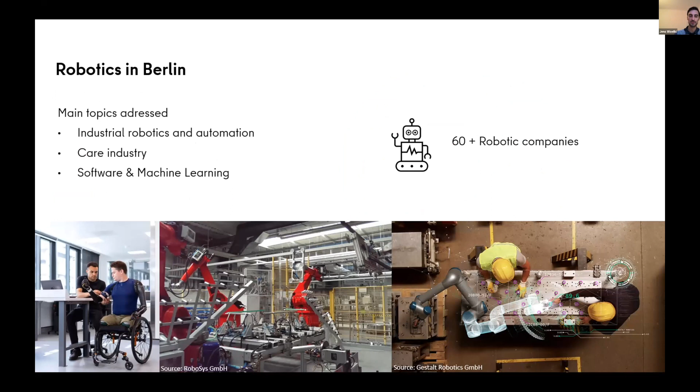That's my last slide. If you would like to get to know more about Berlin, or if you want to cooperate with companies or institutes from the German capital region, or if I can support you in setting up your business here, please don't hesitate to contact me. I'm very happy to support the planned international network, and I'm glad that today we have four representatives from Berlin that will present their technologies and their ambitions to participate in such an international network. Thank you very much. I'm very keen to hear more from the other speakers today.

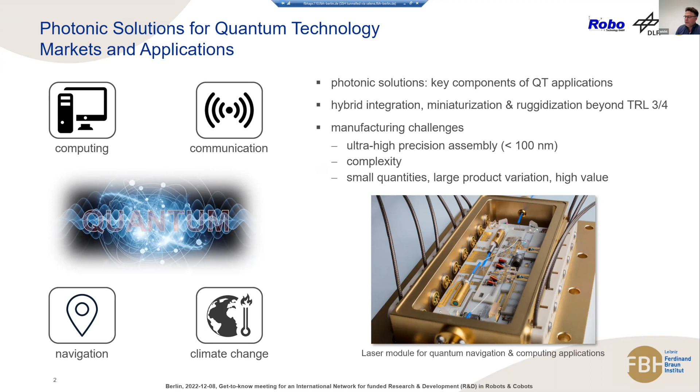Further, typically we talk about small quantities, large variation in the product type, and usually things we produce are also of high value, as single pieces.

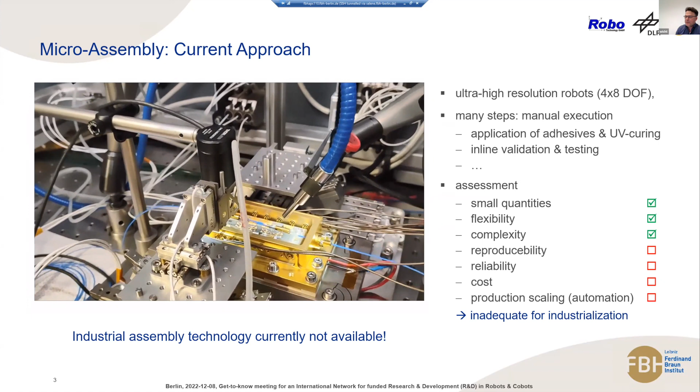So how does it work today? What you can see here is our high precision robots. They are piezo actuator based. You see one of these, the golden piece is the laser module we are currently assembling. The plates you can see are hexapod-like platforms that we can move with 1 nanometer resolution.

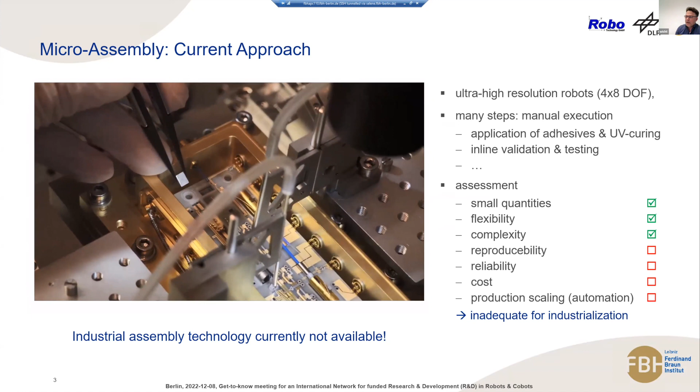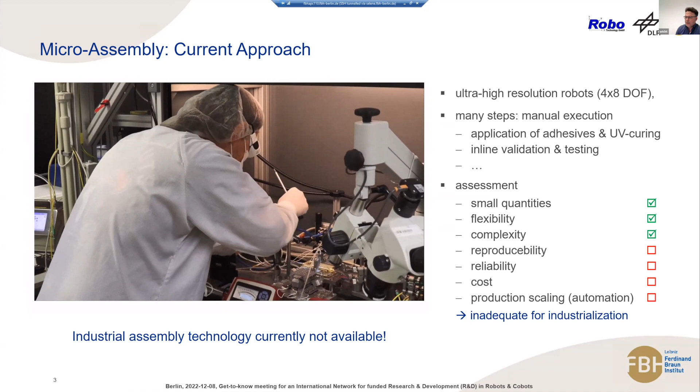A lot of the work is still done by operators, so people have to use their hands to put in components, to modify the integration environment. And this has certain consequences. It's okay if you want to do small quantities - we can typically do about 10 of these lasers per year. It's also very flexible because you can easily modify things.

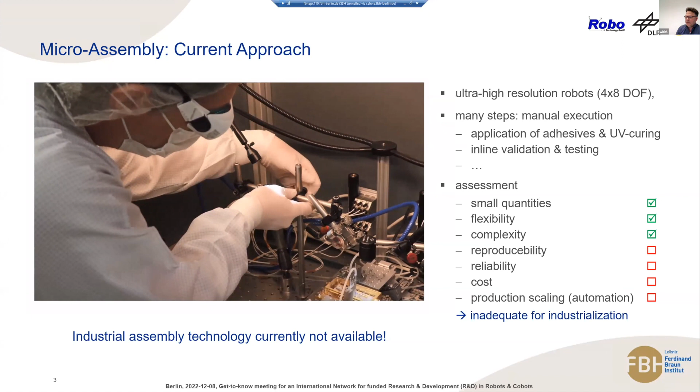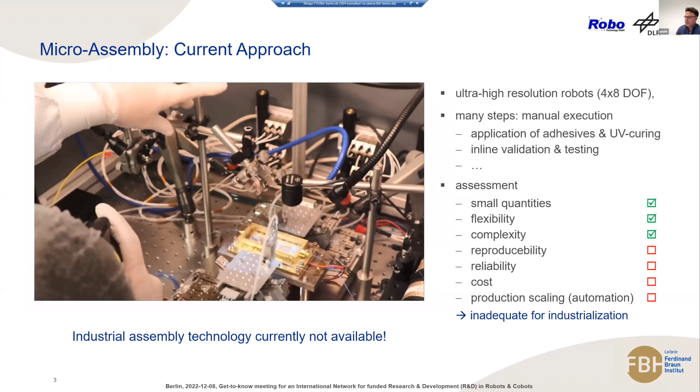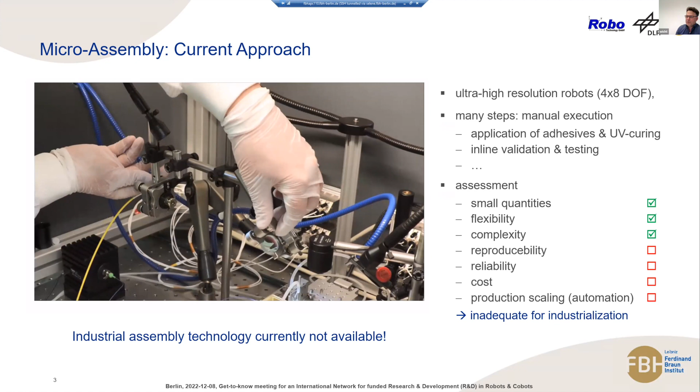We can also deliver highly complex setups. But as a lot of manual work is still necessary, reproducibility is poor, reliability needs to be improved, and cost is very high - just to give you an idea, one of these lasers costs about 100,000 euros. Of course, it's not possible to scale production. So it's an adequate approach for R&D, but an inadequate approach for industrialization.

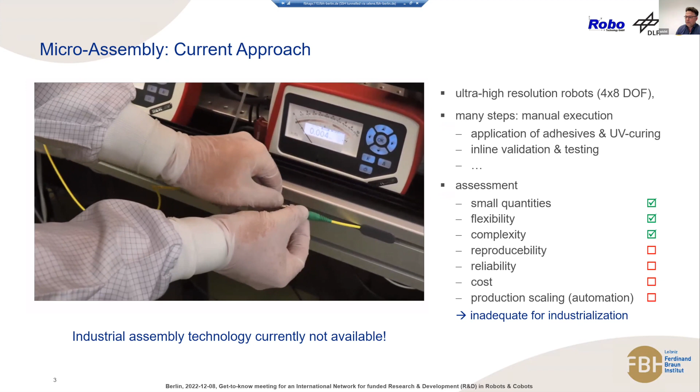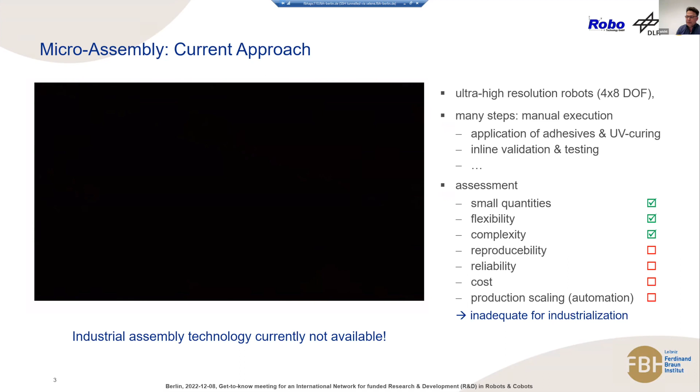If you look for existing technologies, you'll find there's no manufacturing technology available that can cope with the accuracy requirement and also with the complexity. So this brings me to my last slide. I've just described the problem, and this is what we believe is the solution.

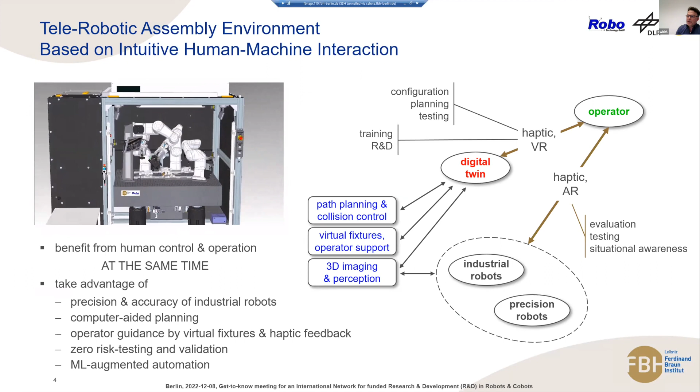The idea is to replace the manual operator with industrial robots. There still will be high precision robots that accomplish the alignment task, but then industrial robots take over work that is typically done by the human operator. The main question is how do you operate this telerobotic environment.

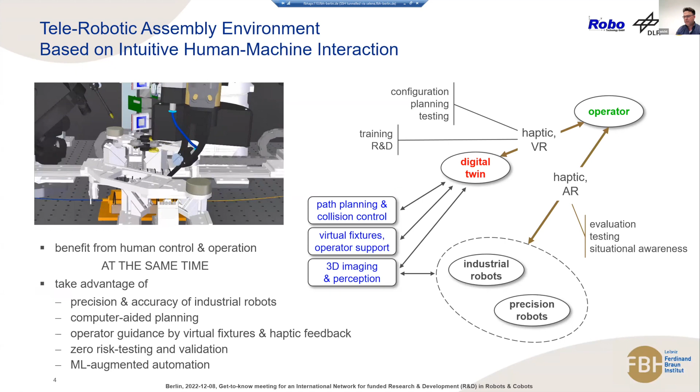You want to keep all the benefits of human operation, so it needs to be flexible. You don't want to have a lot of coding to do. What you're really looking for is an intuitive approach of controlling it. And this is actually what we are doing.

So we are setting up a digital twin with which the operator will cooperate. The digital twin is used for configuring the setup, planning actions, and testing them, also for training and R&D work. There's a haptic interface with force feedback, for example, and augmented reality to evaluate activities that were planned before we actually execute them on the setup.

There's also the idea to create situational awareness, because if you use AR goggles, we can collect a lot of data derived from human activity. The idea is to collect this data and allow the robotic environment to learn from the operator. A lot of work can actually be done without the help of the operator, so path planning can be automated, collision control too. We would use virtual fixtures to support the operator, and there's 3D imaging included, which allows perception, supporting at least partial automation in the long run. So this is, in very short, the idea behind it. I hope you got a decent impression, although I'm not a robotics expert.

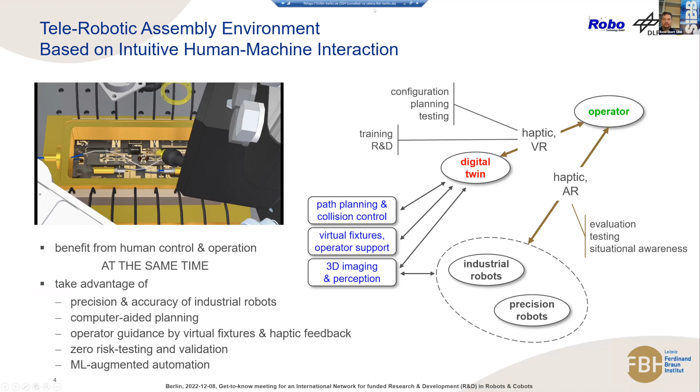This is not the time for it, we have at the end the open exchange discussion round, like we call it in the agenda. But one question quickly to you: how much experience do you have at the Ferdinand Braun Institute when it comes to international cooperation for research projects? Do you have this already? Are you keen on doing this more?

Yeah, so we are very well integrated into the national and European research landscape. I didn't say really anything about the FBH because there wasn't enough time. We are about 360 people working at FBH. We are engaged in multiple EU-funded projects. A lot of money comes from BMBF, BMWK, also the German Space Agency. So this is one of our focuses.

And of course we are always interested, so I'm looking forward to see whether there's any good point for cooperation with other partners.

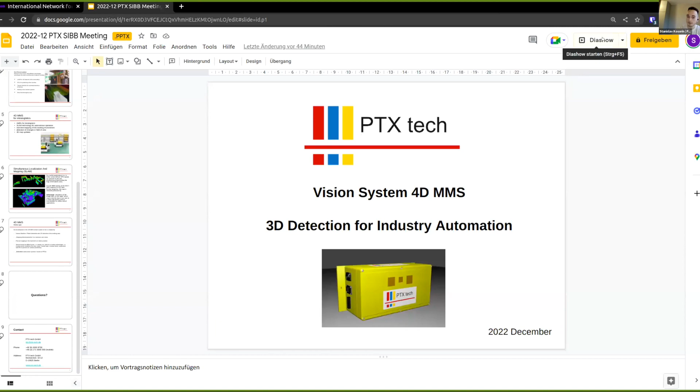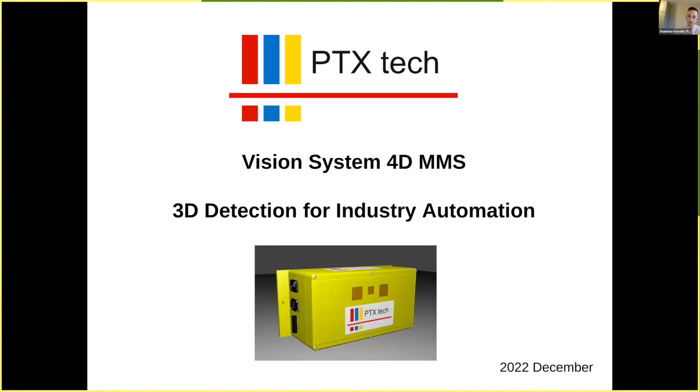So I'm Stanislav, I'm from the company PTX Tech. We're based in Berlin, and I'd like to present to you our solutions and ideas in the area of 3D detection for industry automation. So I'll just cut straight to the chase.

The biggest problem we are addressing right now is that in factories, the safety and security of the workers is currently done with fences and light curtains. So if there's a machine that could be dangerous for a worker, that could injure a worker, there has to be some kind of safety feature in place to comply with the safety regulations of the country.

Our solution for this is our 3D sensor, our 3D platform, 3D technology. How it works is basically we watch the safety area from above, the area where it could be dangerous, and then we detect any intrusions of the safety area by humans or robots, maybe, whatever. So these light fences or light curtains could basically just be put away, and our technology could be the solution for this.

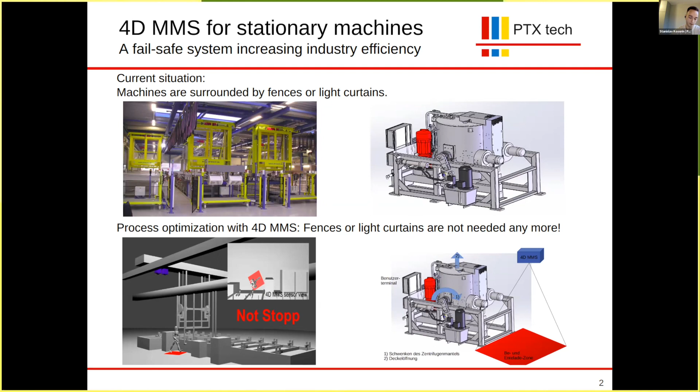So why is this important? The idea is that when someone steps into these light curtains or fences, the whole production has to be stopped basically. With our sensor, we actually increase the efficiency of the whole production while being as safe as these fences or light curtains.

And of course, there are subcategories of what it means to improve these logistics and production processes. There is, for example, man-machine interaction with robots and machines, which I already talked about. There's also dynamic pick and place, volumetric dimensioning, or the detection around AGVs and vehicles, which I'll be talking about in detail later.

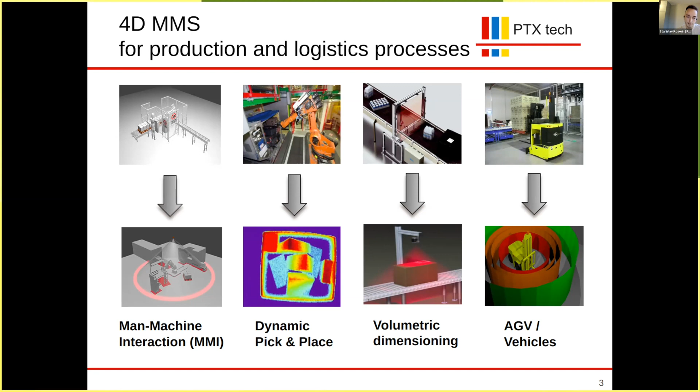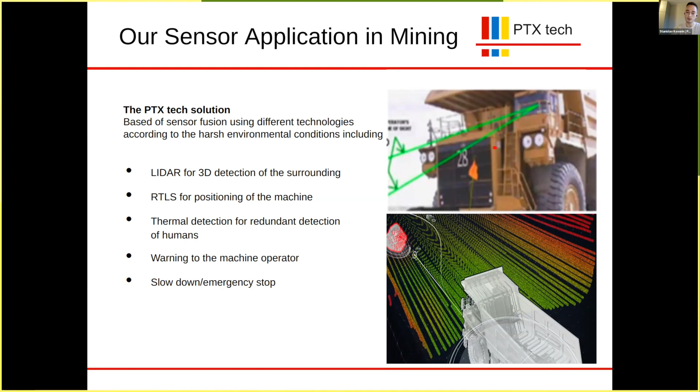Our current application, what we're actually working on the most right now, is application in mining, basically in mines or quarries or any area like that. We use our 3D detection for that, but these environments are very difficult for detection, localization and mapping. So we're looking to cooperate with an RTLS system, real-time localization system for positioning, or maybe other sensors. This is an area where we already experienced so-called sensor fusion, combining multiple sensors to build a robust system. The idea is to give a warning to machine operators, or slow down machines or stop them if there's a collision.

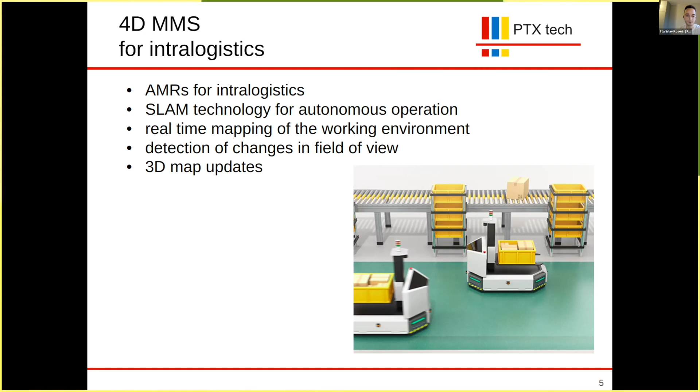Also, as I mentioned, our application in the area of intralogistics is the so-called SLAM technology. This is actually my area of expertise. SLAM is simultaneous localization and mapping in factories or indoor areas, where the robot runs around, maps the area, and simultaneously does localization, so we know where the robot is in real time, or the AGV. This has already been done multiple times, in multiple use cases, but what we do is real time - it gets computed on the robot in real time, and the positioning also gets done in real time.

The problem we are facing right now is once again with the real-time localization system, which we're looking to expand in that area to combine our 3D detection with some kind of localization, so that the detection is robust and able to work for multiple hours without being reset or without human intervention.

So that was maybe a lot of stuff at once, but basically our main points are human, machine, and robot interaction with 3D detection in industry applications with difficult conditions, or where robots or machines could injure humans. Then there's precise mapping and positioning of the machine, and also an area really exciting for us: sensor fusion in difficult conditions, where we'd love to cooperate with other sensor companies or platforms. Oh, and I forgot to mention, we built our systems and prototypes - the hardware, the FPGA - ourselves and programmed it ourselves in order to fit the use case perfectly.

As you can see, this is a very difficult topic, a very difficult area, and not many companies actually do 3D detection because it's hard. That's why we're looking for any collaborations, scientific or industrial, and we're very open to ideas about use cases and discussion.

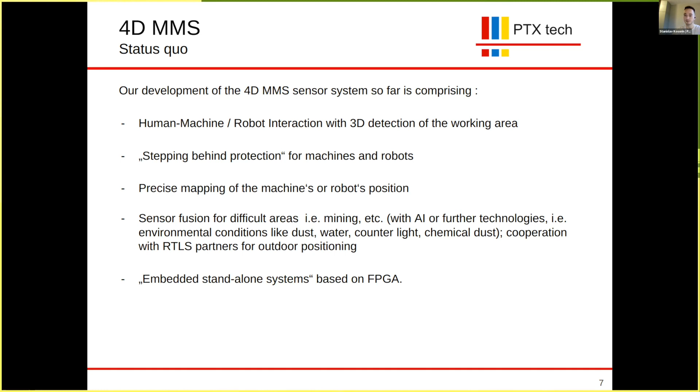So thank you very much for your attention, and if you have any questions, just ask. I'm very eager to answer.

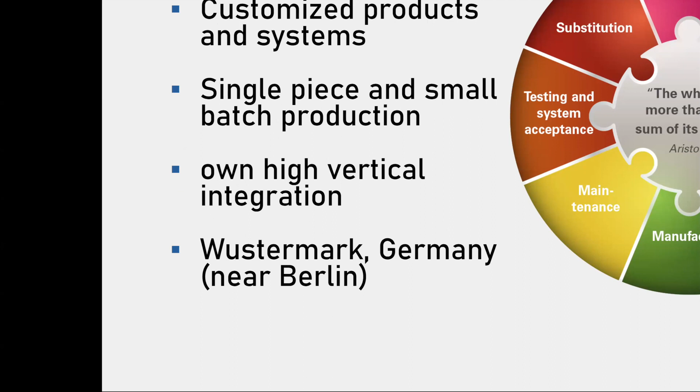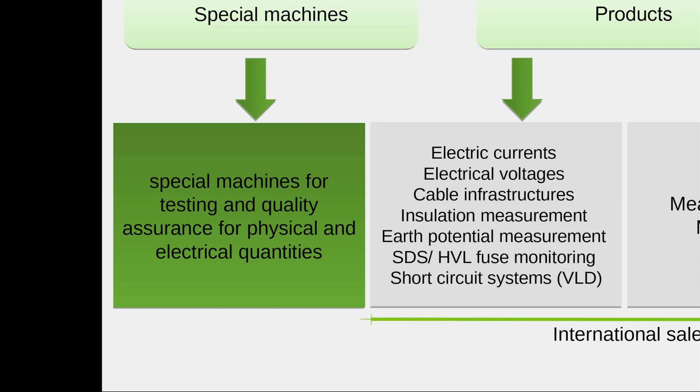In Bern, in Switzerland, some other countries, also now in Taipei, and in Turkey we have installed some special devices for monitoring in the railway industry, special DC monitoring. So that's a short impression about our customers.

To understand this a little bit more: when you have a railway system, you need different kinds of monitoring devices to control it. So you control your voltage, you control your current, etc. And you have a system to monitor potentials too, so that everything runs safely.

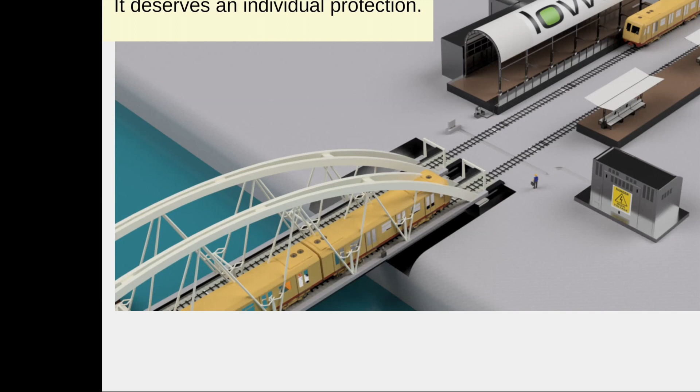So this is what we are doing, and we are developing this around the world. We do this with special hardware, and what we design is very flexible. So on one side, the software level is quite easy to make individual.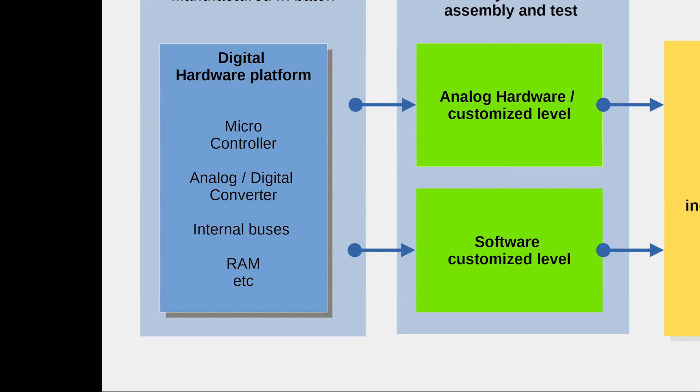But what we are also doing, we make the analog device individual for the customer's jobs. That's what 'individual' means here. We have some analogs where we could measure milliamperes, millivoltage, but also we have a project where we develop measurement of 175,000 volts and 80,000 amperes. So we have a wide range of what we could measure and control on our platform.

The platform is a component of different kinds of devices, which you could assemble like Lego. You could put this together and do different kinds of control, everything you need for the DC level, etc. So it's a lot of engineering.

I could tell you a lot about railway, a lot about what I'm doing, but what I'm more focused on is my idea to go into a project we are doing. So we are experts in DC. We say, why is DC interesting?

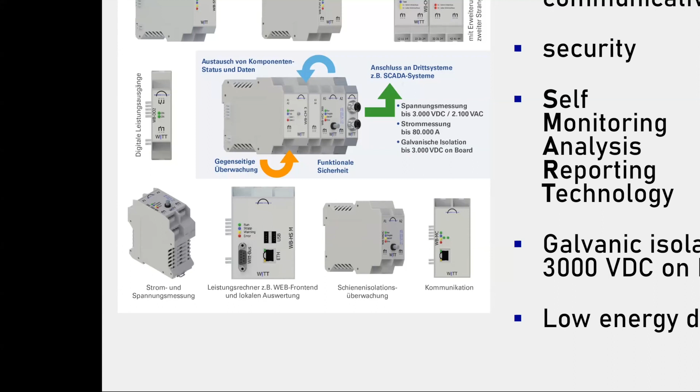It's very simple, because you could save a lot of energy when you use DC. The normal way is when you have a normal industry system, you have AC input, and then your computer runs internally with DC. Your light has no problem running with DC. Your actuators, up to the energy you need, also have no problem running with DC. And your robots, of course, also run fine with DC. So with all conversions between AC and DC, you lose a lot of energy.

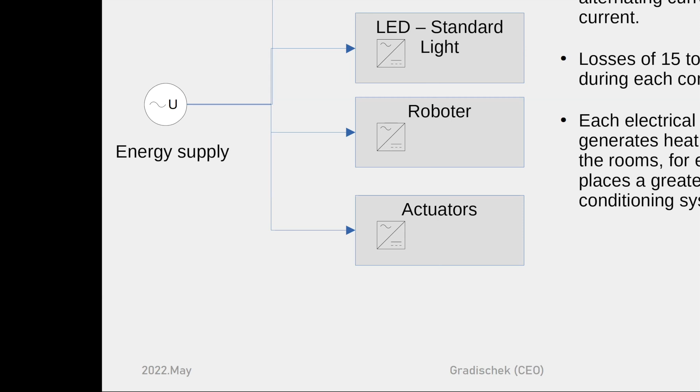When you think a little bigger - I know this from a special company in the car industry - we had to make a calculation. It's a huge plant, but not the biggest plant from this company. They save more than 5 million euros per year just by taking everything from AC to DC and changing it all. So we have a big project with them underway to change a lot of things in this company. I hope the screen is okay - I made a short copy, so I don't really see it.

But why do we talk about DC? We have solar panels, we have them in the east too - there's no problem getting solar panels on your roof. You have batteries, for all the cars, all the trucks, all the buses - the batteries need a new second life.

So now you could make a different kind of cabinet. When you have an AC cabinet, everybody could work with them, everybody knows how to do this. A DC cabinet is different, but we are experts in DC cabinets, so it's no problem for us to make planning for that, to integrate that. So that's what we're doing for some special projects.

What our project is looking for is we will support companies to change robots, for example, from AC to a DC system. We integrate that. So for the customer on the line, when they have a solar system on the roof and a battery system, for example, they could save a lot of money for that. So this is one of the projects.

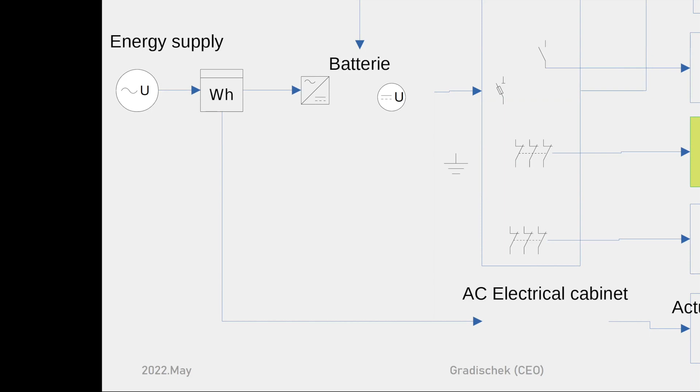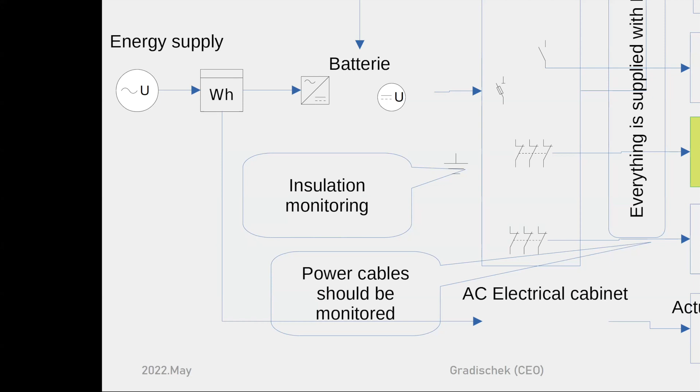We have devices, we have the idea, we have to know how to organize a safety system for a DC system when it's changed between AC and DC, that's what we're talking about. You have different kinds of requirements: insulation monitoring, special cables, etc.

Our second idea for this project is we want to make a handling system for assembly support. Our customers are railway industries and some other individual companies who build machinery.

A wagon in a railway is very heavy, and they have a lot of jobs that are very complex to fix because they always need a support transport system on the top floors. It's much easier when we have some other support system to assemble that, or for repairs. We spoke with some customers before, René called me, and I went to the customer and said, hey guys, is that an idea from you?

And they said yes, yes, it will be helpful, because we have use cases where the top transport, the heavy system that normally handles this, doesn't run smoothly. It's uncomfortable for the assembly workers, and handling heavy things manually is very dangerous.

So the idea now is that we give the human a cobot, not because when I spoke with them about robots, their thinking is always the same, that robots always do the same job.

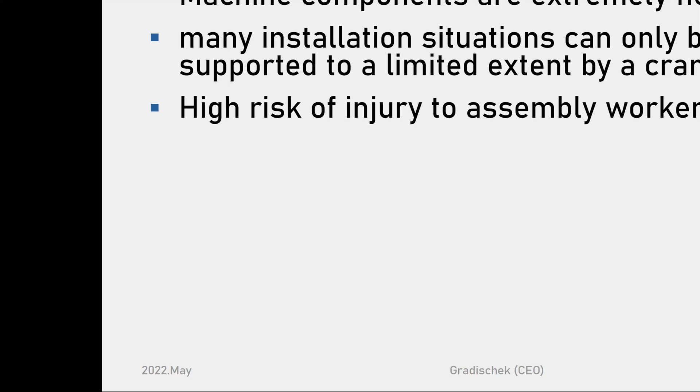Because we are not experts in robots, we are experts in DC and measurements. We also do sensors, vibration sensors. We have special devices that analyze railway industries and rail infrastructure. So we have measurement devices, we do sensoring, and we make the data ready for the next level, for motors, etc. Okay, so that is our idea, and I hope we could join something together.

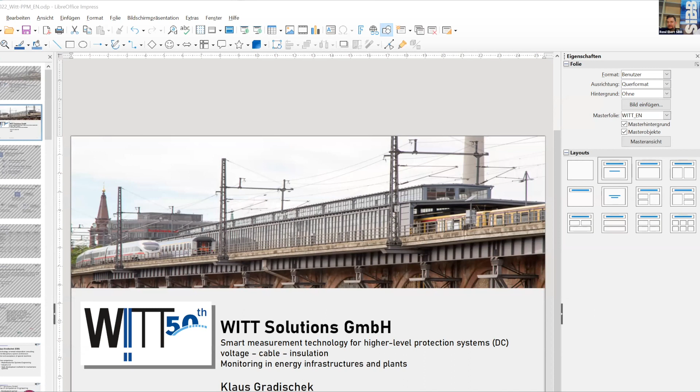I think you touched on the point, even if you didn't mention it directly, of lacking workforces. I see that in every branch, not only in IT, but in other industries too, we are struggling with the lack of workforces, and there might be cobot solutions in the future that we can't even think of today. But you had already highlighted one of your ideas from your customer base.

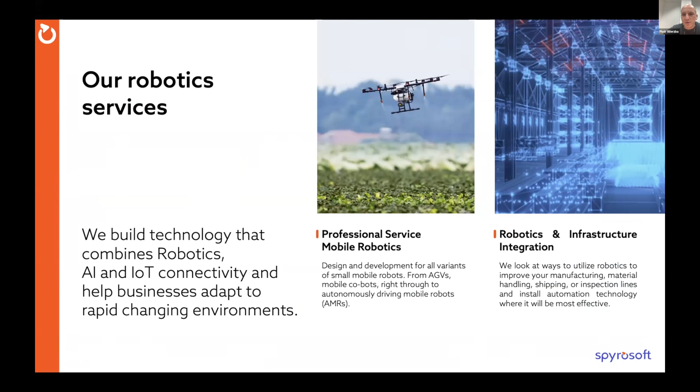Oh, I see that Piotr is sharing the screen. That's great. Yeah, this robotics is something we have in our heart, and these mobile robots are presented here. On this slide, you see that we are good in professional services for mobile robots and also infrastructure. So this is on the right side.

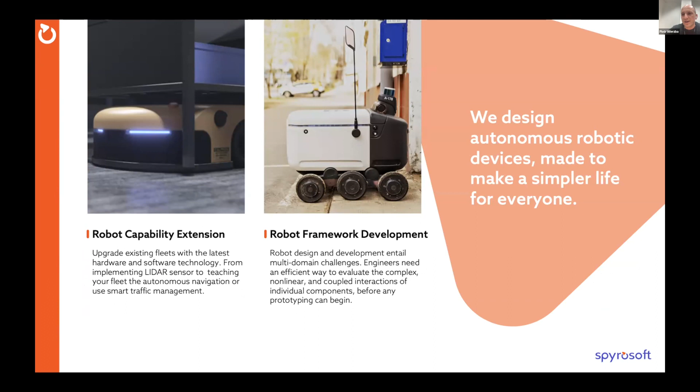On the next slide, please Piotr, we have some ideas how we can extend the current robots. Our customers come to us and say, yeah, we have a robot off the shelves and we want to extend it with something more. So this is what we are doing. Looking at the competences in short, yeah, I have 2 minutes so I'm running fast.

So from the left, we are doing the design for these robots in terms of platforms like fleet management, through the data, through the cloud. Nowadays cybersecurity and connectivity is quite important, because robots are flying and it needs to be safe. So that's why we are taking care of that area as well.

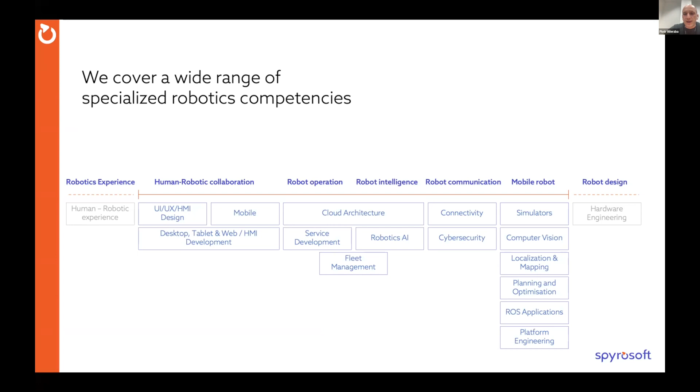And in the end, these mobile robots - what I mentioned about simulations like in Gazebo, or computer vision, the eyes of the robot, and the navigation. This is something we often do on the ROS platform and on different hardware. So this is the competences we take care of.

Just to put our imagination on, even that it's after 4pm - for instance, we take care of special elements for drones in terms of LiDAR scanners. This is what we are doing right now in our office in Szczecin. Szczecin is close to Berlin, so we have a short road. Rene visited us last time, so I think this is proof.

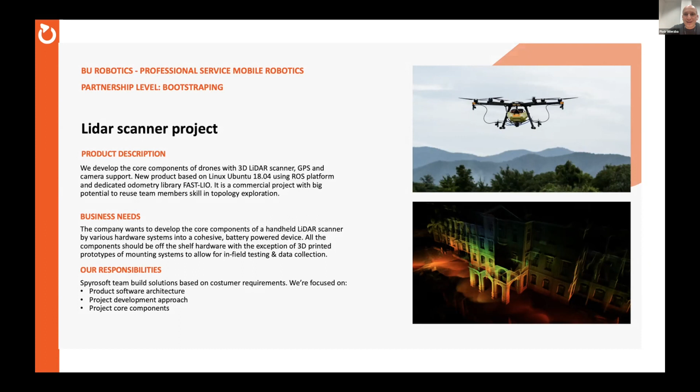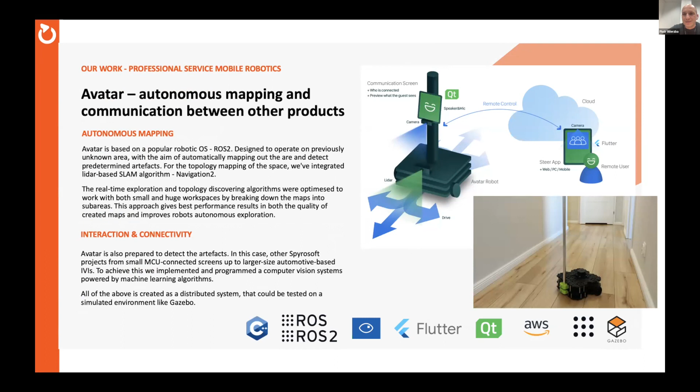Looking at the next slide, just to show you the skills we have - we do a lot of concepts of robots, starting from simulation to navigation, like you see here. So this is just an idea of what we can do together. Happy to talk with you.

Thank you very much, you did a tremendous job. It's all about wow - they have to have the wow effect in the brains of the other CEOs and companies, executives we have here.

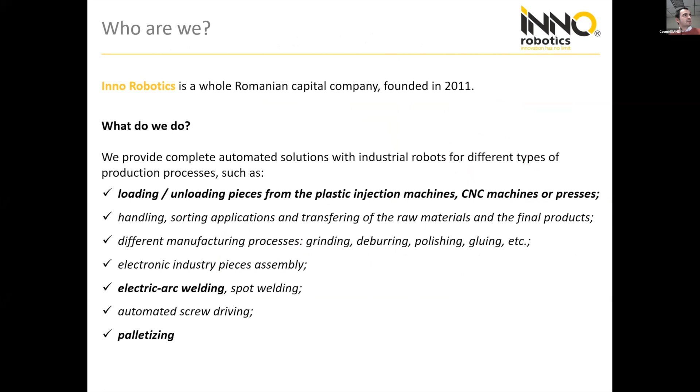So the name of the company, Inno Robotics. Again, this is a short history of the process which we made until now.

As I presented, we work with a few big names in robotics and also on MIG-MAG welding. Now we have under development a new robotic cell for laser welding, with TRUMPF equipment. It's a new process which is not on the market yet. We try to weld remote with some powder. This is for aluminum welding. It's a very new process, and I think it will be a success in the future.

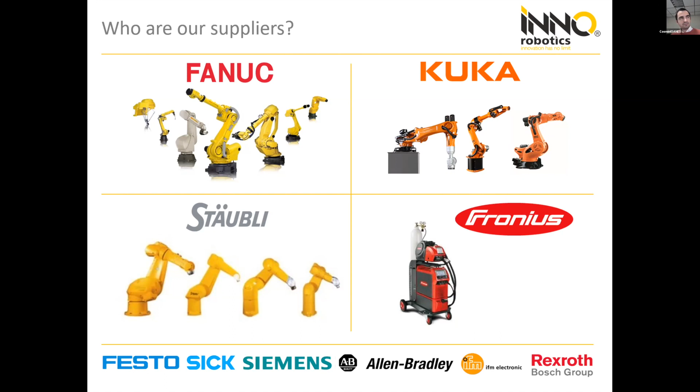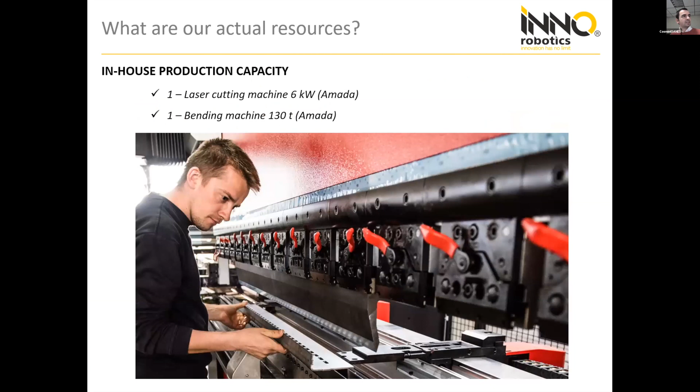Also, we have some in-house production capacity because we make a lot of parts which we need for our equipment. Regarding development, we started the expansion. This year we opened an office in Hungary. We have a plan next year, in the middle of the year, to open an office also in Germany, where we try to have offices for sales and support, and after that see how we can grow there. And the next one for the plan is Poland.

Regarding R&D, as I said, we started in October with some institutes from here in Romania to develop a new robotic cell for laser welding. I can talk more about the project, but probably we can connect another time for this.

This is a part of the customers which we worked with until now, and some of the products which we developed in the last 2 years for the market.

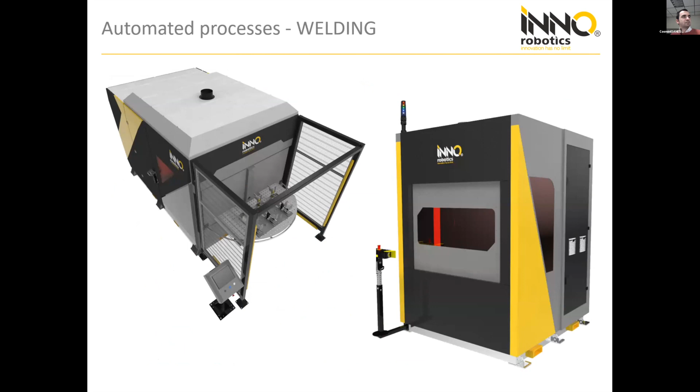The last project which Andrei presented was on European funds, on DIH. It's a robotic cell which was developed for small and medium companies. It's welding, and after that polishing the part. It's only for this company because it's necessary to have a small batch of parts. For high volume, it's necessary to have a separate cell, but this is proper because it's not a huge investment for the company.

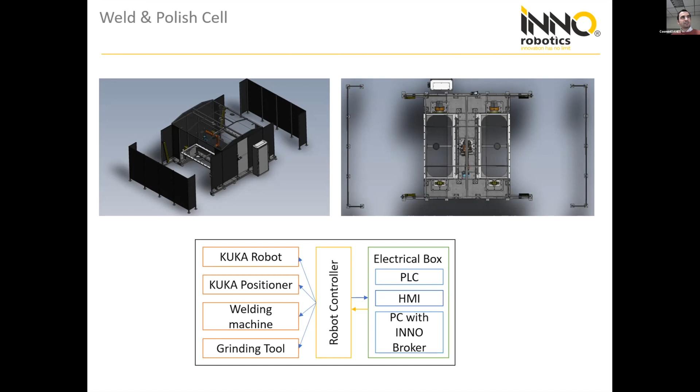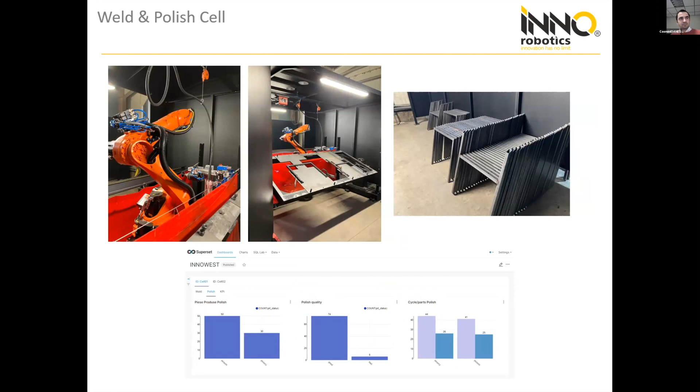And after that we collect the data, and the manager of the company or the people who are interested can look at the result of the cell and the parameters on which the cell was working.

This is mainly what we made from analysis of the process. After that we made the mechanical design, electrical design, also simulation, and in the end we delivered the cell to the customer and made the training for the operators and for programmers.

I saw the first presentation in this session, it's very interesting. We have now a situation where we have a palletizing cell. It's very small because in the factory there is not much space, and we also have an AGV which enters there and takes the pallets with the product, but it's difficult to ensure the security of the people who can enter the cell. We have light barriers, but that 3D system which can monitor the space is very interesting.

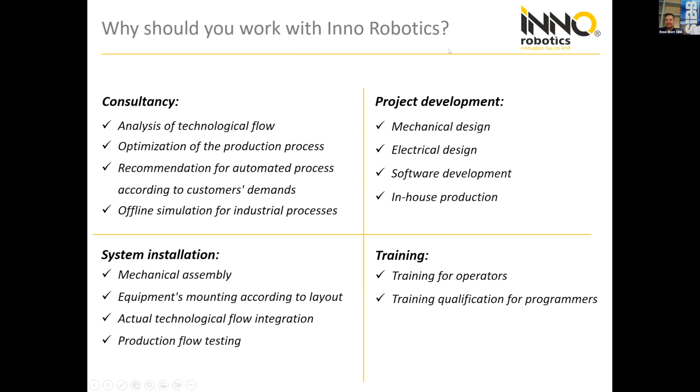Who's next? We have some minutes left. There is also Josif Lukian from our association. Hello, can we, to make it fair, maybe there's another association from another country who also has a company. There's one mentioned in the chat, I see, Panza Robotics. From which country? From Slovakia. Please feel free to take over the screen. Just to show various countries are also present with companies here. Hello, Mr. Sarňák, feel free to present your company.

Okay, can you hear me? Yeah, okay, thank you very much. I will be as fast as possible. We have developed a quadruped robot.

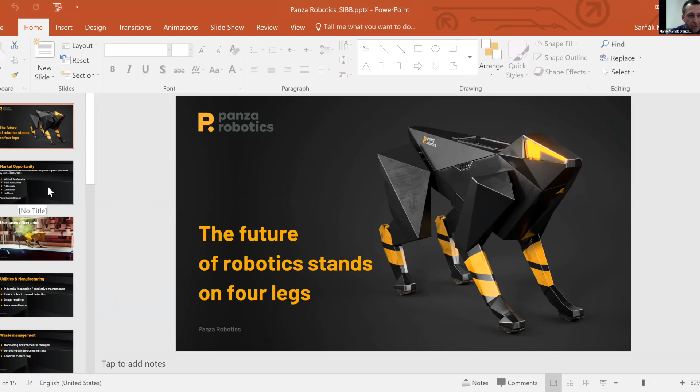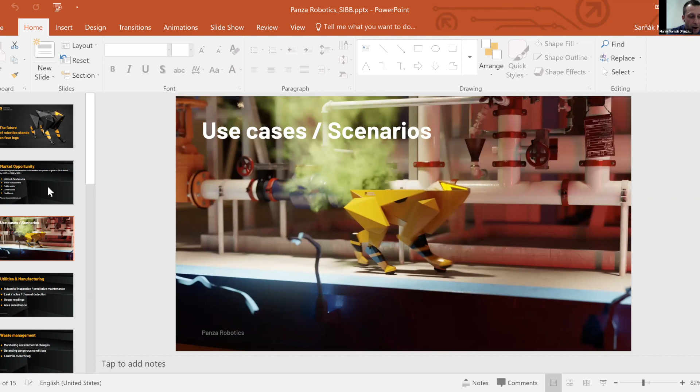Can you see my presentation right now? Yes. Okay, so it's a universal robotic platform which is dedicated to use in many sectors of the economy, like oil and gas, utilities, manufacturing, waste management, public safety, construction, and healthcare. For the time being, we have identified many use cases and scenarios, but we can talk later.

Other specifications are as follows: four in-depth cameras, software based on Robot Operating System and Ubuntu. So it will be the main competitor of Spot from Boston Dynamics and ANYbotics. Now we are in the phase of training prototype 1, so we can say we are in TRL4, and we are moving to TRL5.

It means it will be ready to be developed in a customer's environment. For the time being, we have our first customer signed from the construction and development area, and we are working on prototype 2 to be fine-tuned. Next year we would be happy to start small series production in Q3, Q4. It depends on the financial round and our progress, which is, for the time being, really fast.

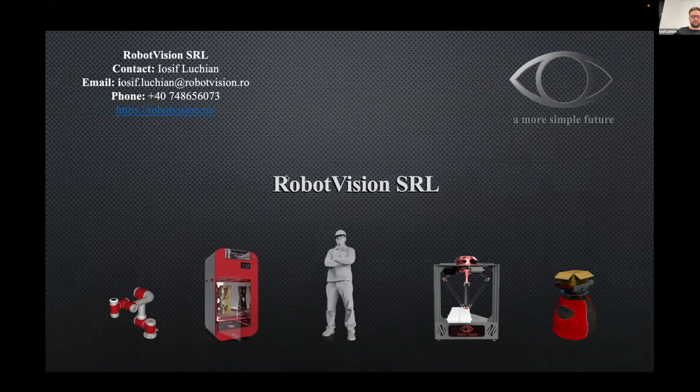Robot Vision is a startup with 5 employees, focused on developing our own robotic products. You can see here these products: a 3D printer, a pick-and-place solution robot, and an autonomous mobile platform.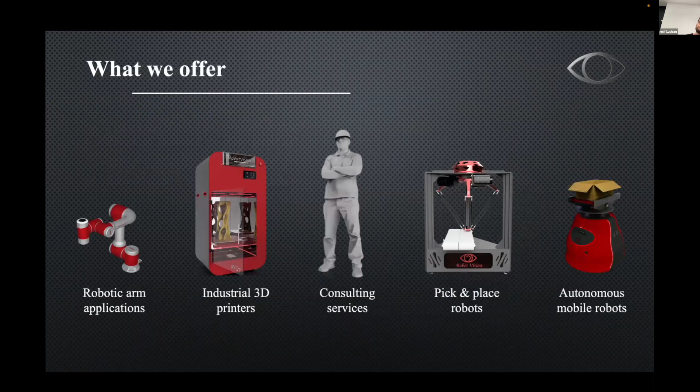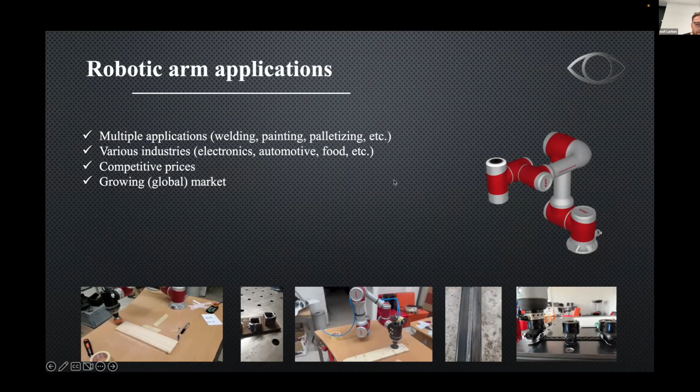For robotic arm applications, we started 1 year ago to develop applications for cobots, like sanding, painting, welding. You can see here a good welding line, and we also try to 3D print with an arc welding gun.

Another product we developed here in Cluj, Romania, is industrial 3D printers with big volumes and high productivity due to the high printing speeds.

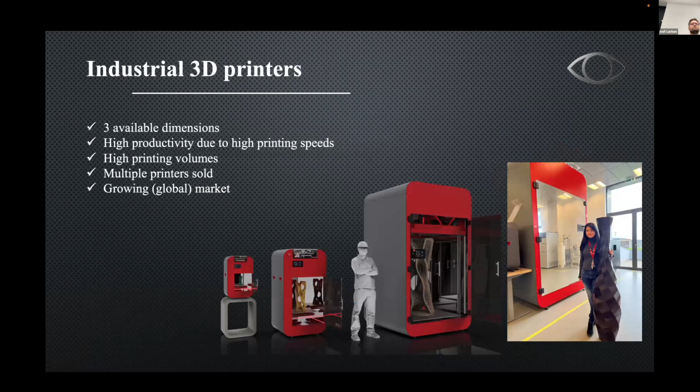Another product is a robot for pick and place with high speed and intuitive graphical interfaces for programming.

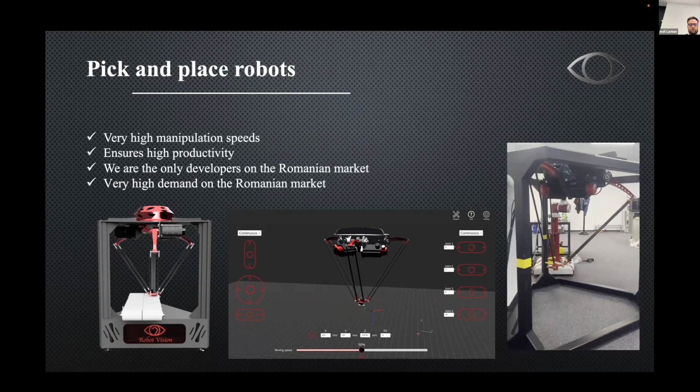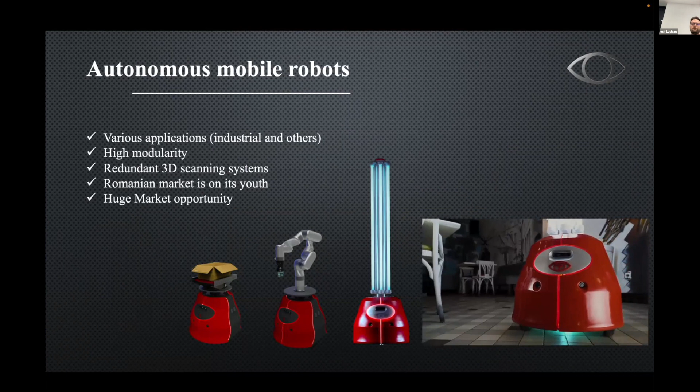Another application is a modular autonomous mobile robot platform, which can be used in industrial or other applications like UVC cleaning and disinfection.

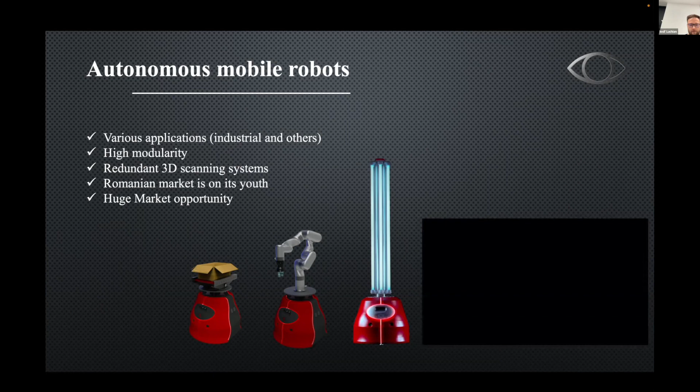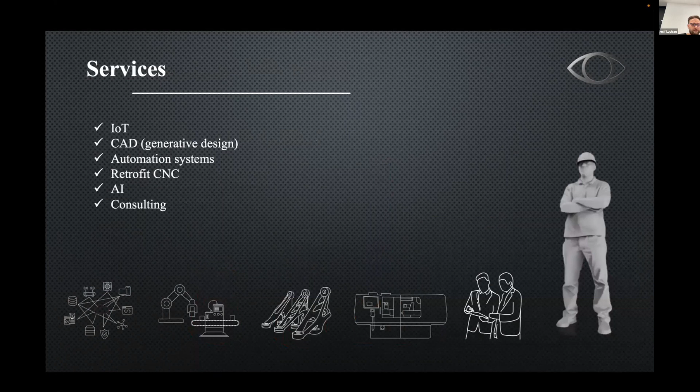The next slide is about our services. Our services are for IoT, CAD, and automation systems, retrofit, CNC, and AI and consulting.

Our goal is to certify our products and launch them to market. Okay, this is all, thank you.

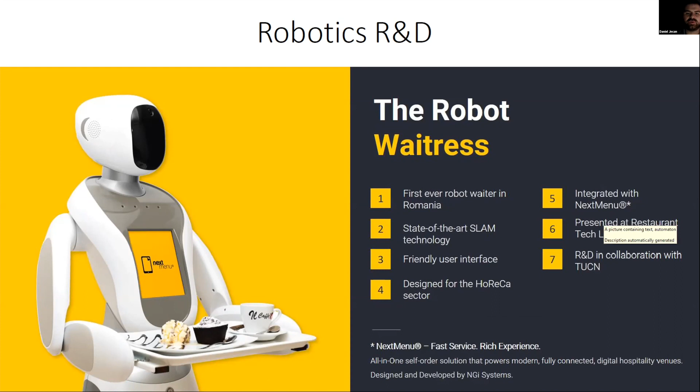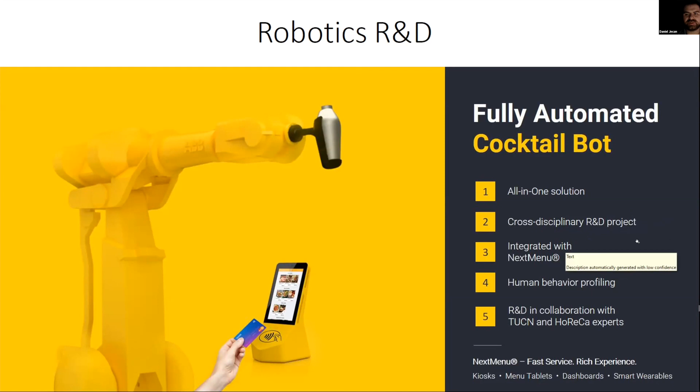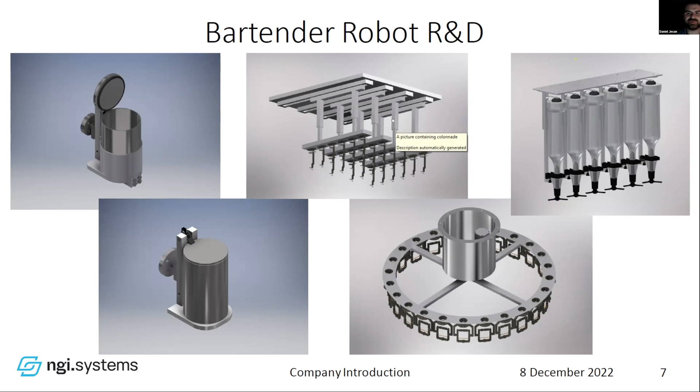We did it ourselves, and the product itself actually received a Red Dot Design Award, probably familiar to you, for the design and the innovation brought by the product. We're very much interested to collaborate with others in the network, and our focus would be especially on the integration part. We're very passionate about hardware and software alike. Thank you very much.